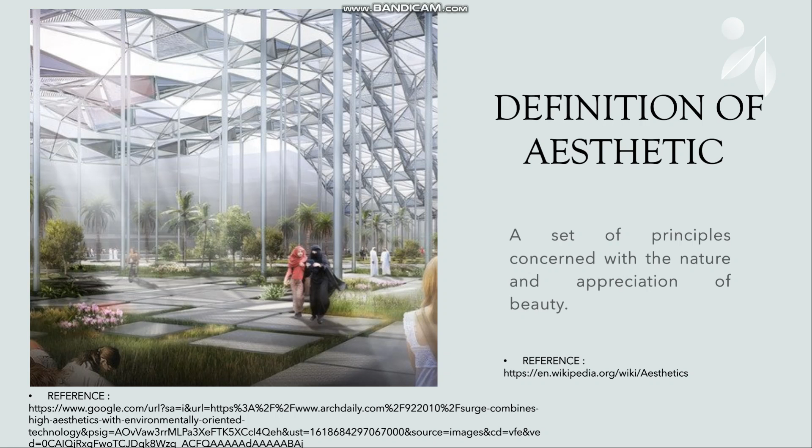Today I will talk about Ecotech architecture. I will start with the definition of aesthetic: the set of principles concerned with nature and appreciation of beauty.

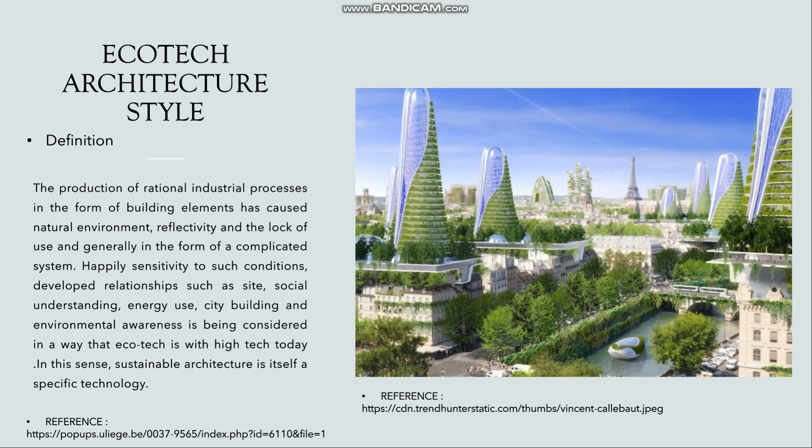The definition of Ecotech architecture style: the production of rational industrial processes in the form of building elements has caused a lack of natural environment reflectivity and use, generally resulting in a complicated system. Happily, sensitivity to such conditions developed relationships such as site, social understanding, energy use, city building, and environmental awareness being considered in the way that eco-tech is with high tech today. In this sense, sustainable architecture is itself a specific technology.

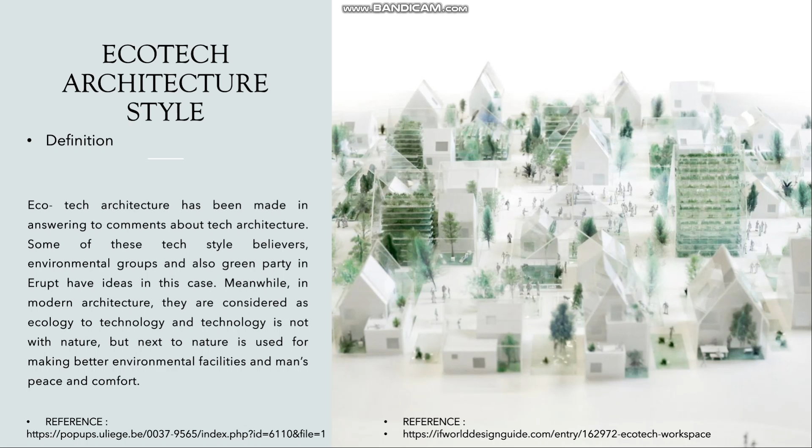Continuing the definition, Ecotech architecture has been made in answer to comments about tech architecture. Some tech style believers, environmental groups, and also the Green Party in Europe have ideas in this case. Meanwhile, in modern architecture, ecology is considered alongside technology, and technology is not with nature but next to it, used for making better environmental facilities and man's peace and comfort.

The origins and history: in 1968, Morton Hilbert, an American university professor, held the first awareness days to talk to students about ecology. On April 22, 1970, Gaylord Nelson, U.S. Senator, promoted the first demonstration claiming the importance of the environment. Moreover, social pressure increased for the creation of International Earth Day to raise awareness about overpopulation, pollution, biodiversity conservation, and other environmental concerns to protect the planet.

This situation led architecture to seek adaptation and evolve at the same time, so ecological architecture has emerged with variants which, although starting from the same root, have their own principles. We talk about low-tech, ecological architecture, high-tech, and Ecotech.

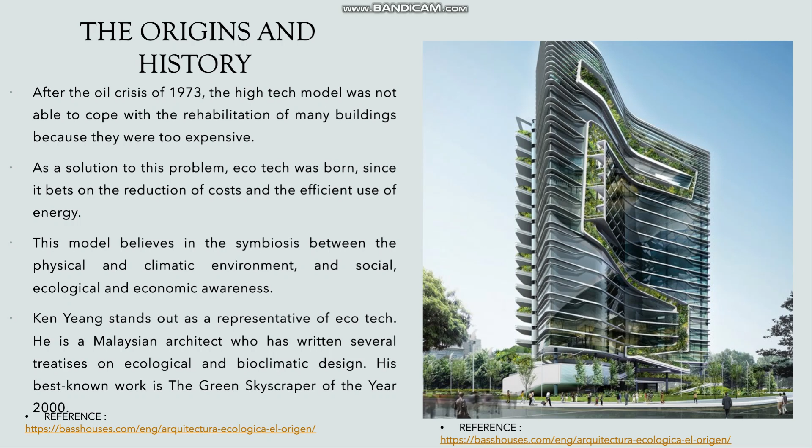The architectural characteristics of Ecotech architecture style: there is always a section of the building that displays how to use climatic factors with the help of equipment like air chimneys, reflective mirrors, smart shells, greenhouses, glass stairs, and thermal exchangers. The form of the building is designed due to the angle of the sun's rays and the speed and direction of the wind in different seasons, besides having a lot of plants and green areas.

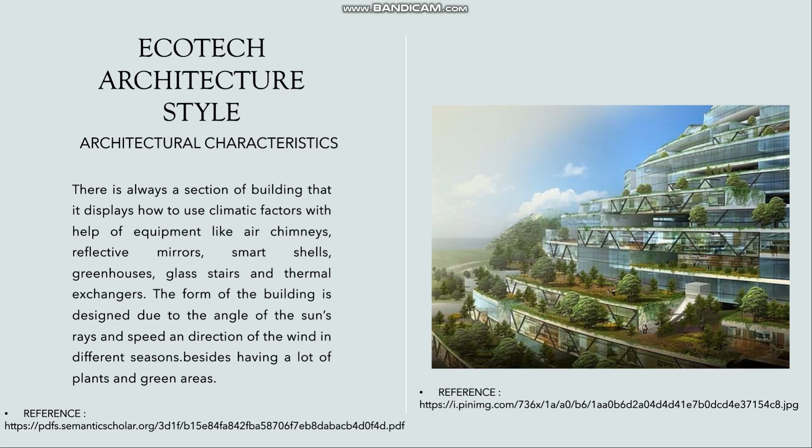Aesthetic philosophy: ecological aesthetics could date back to evolutionary theories. Aesthetic preference has changed through time and may reflect public understanding of ecology, which provides a critical linkage between humans and ecological process. Landscape aesthetic and ecological quality can coincide in some issues, such as the idea that visual variety in the landscape is stimulated by natural patterns and related to the incidence of biologically productive effects.

The experience process and influential factors of beauty in landscapes with healthy ecology were drawn out, resulting in benefit for good landscape with healthy ecology. Within this context and principles, the construction of good healthy ecology and sustainability can be achieved.

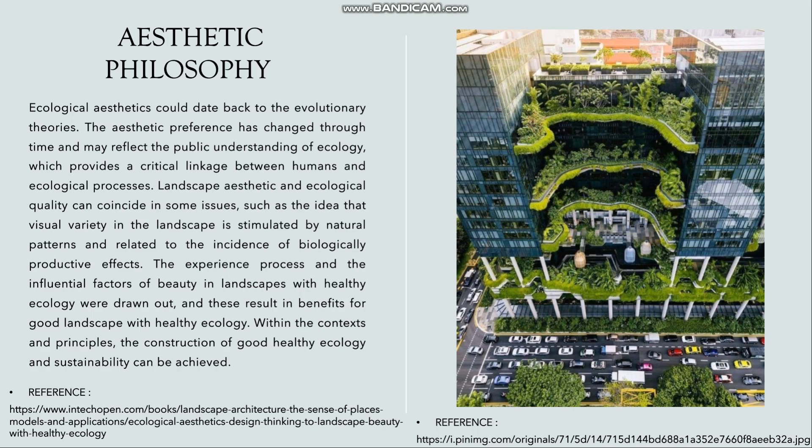As a summary, architectural solutions such as entering natural light inside buildings can make the space aesthetically beautiful. Materials for increasing energy efficiency and having green areas were also part of it.

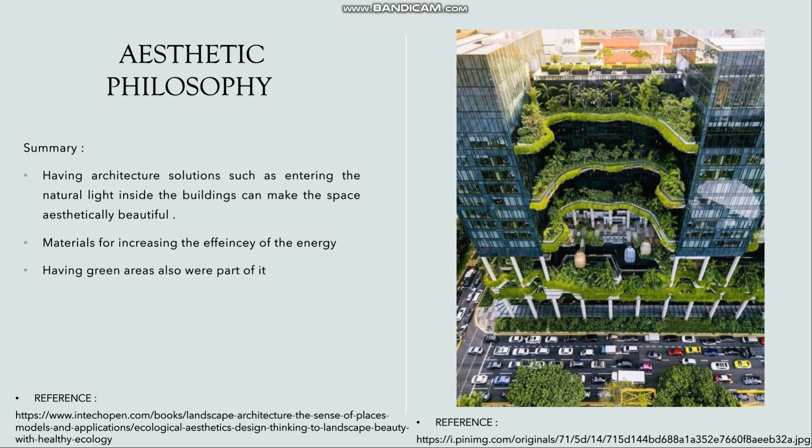So why is the style beautiful? Since Ecotech architecture connects people to nature with openings, transition spaces, and outdoor rooms, it makes the space look beautiful and green. Natural light makes the space much more beautiful. Interior spaces are wide and large, especially in the gallery part and corridors, along with outdoor gardens and green areas where people can walk easily.

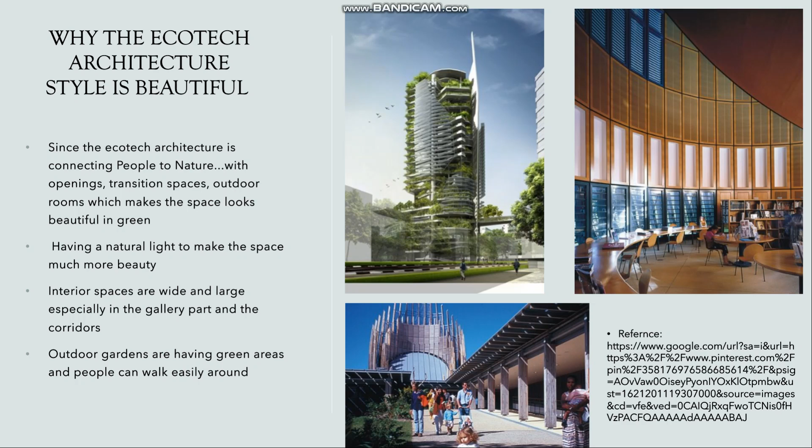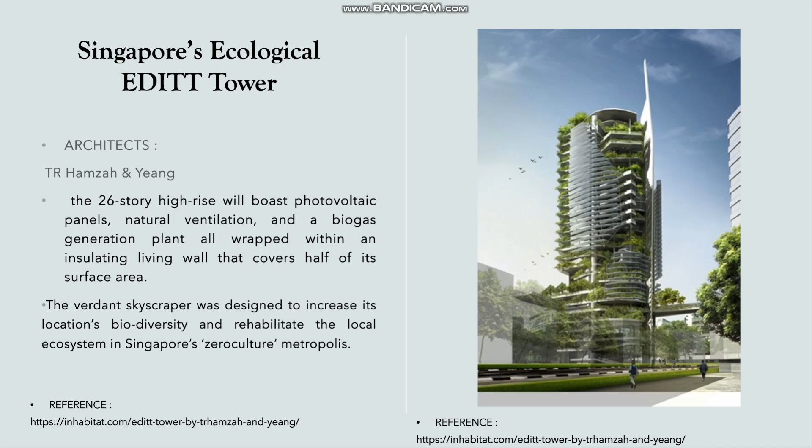The first study case is Singapore's ecological EDITT Tower. The architect T.R. Hamzah and Yeang designed a 26-story high-rise featuring photovoltaic panels, natural ventilation, and a biogas generation plant, all wrapped within an insulating living wall that covers half of its surface area, designed to increase its location's biodiversity and rehabilitate the local ecosystem.

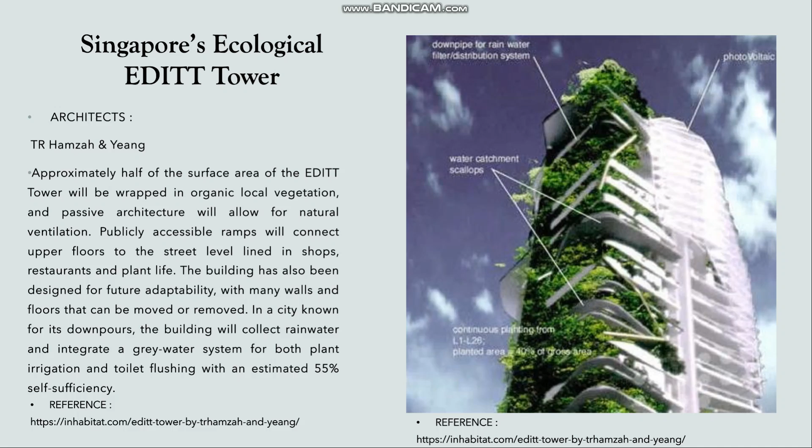Here you can see how the rainwater system was applied along with photovoltaic and water catchment systems. Why is it beautiful? The facade of the building has balance with the green areas and glass parts, besides having balconies on each floor. That's what makes the building aesthetically beautiful, and since light can enter easily into the building, it makes the interior space look beautiful.

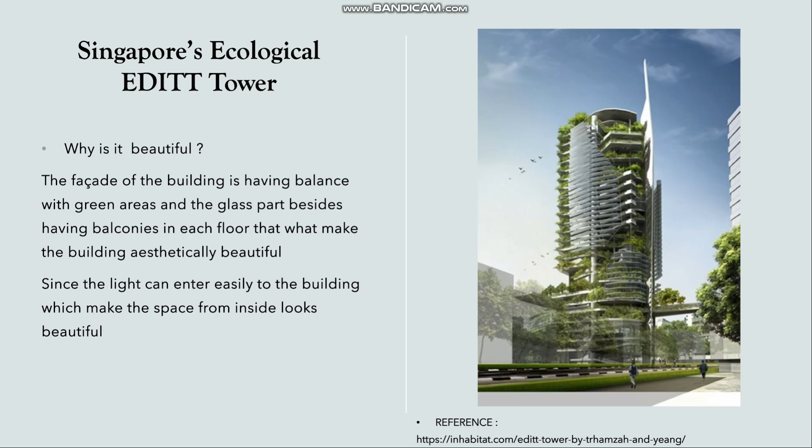The second study case is the Jean-Marie Tjibaou Cultural Center by Renzo Piano Building Workshop. Taking inspiration from the Kanak people's deep ties with nature, the project sought two main objectives: to represent the Kanak's talent for building, and to use modern materials such as glass, aluminum, steel, and modern lighting technologies, along with more traditional wood and stone. It was designed as a cluster of huts, small pavilions, and tree-filled spaces.

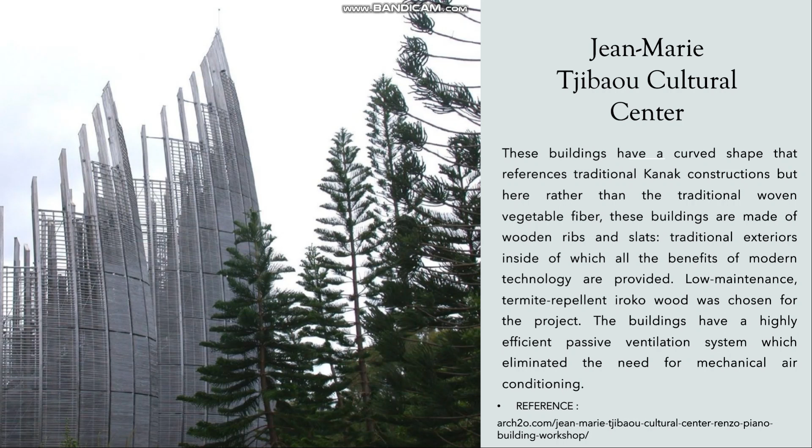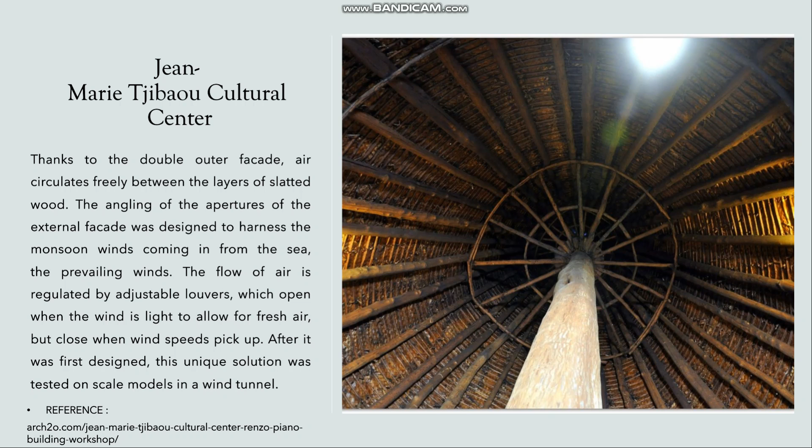These buildings have a curved shape that references traditional Kanak constructions, but rather than traditional woven vegetable fiber, they are made of wooden ribs and slats. Here's the inside: thanks to the double outer facade, air circulates freely between the layers of slatted wood.

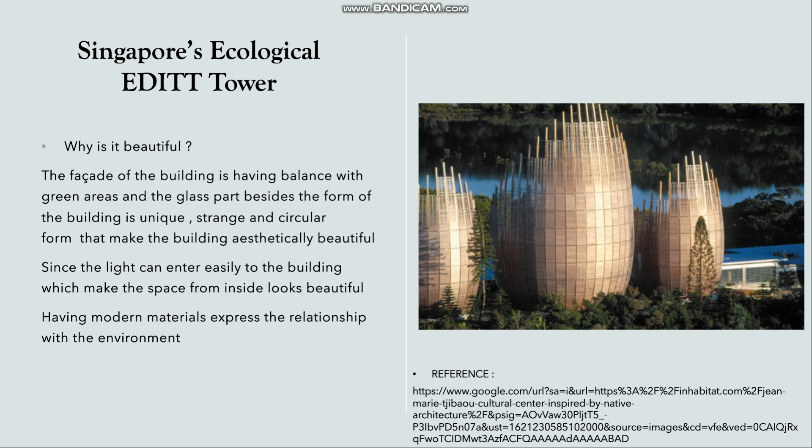Why is it beautiful? The curved facade of the building has balance with the green areas and glass parts. Besides, the form of the building is unique, a strange circular form, which makes it aesthetically beautiful. Since light can enter easily into the building, the interior space looks beautiful, and having modern materials expresses the relationship with the environment.

The famous architect Norman Foster said: we have to learn from the past and combine that with the most advanced technology of our time to achieve a suitable quality of life that improves relations between human beings and the planet. Renzo Piano said London is one of the most civilized places in the world for the procedure of making architecture and urban design. Richard Rogers said the only way forward if we are going to improve the quality of the environment is to get everybody involved. Ken Yeang said: I think buildings should imitate ecological systems.